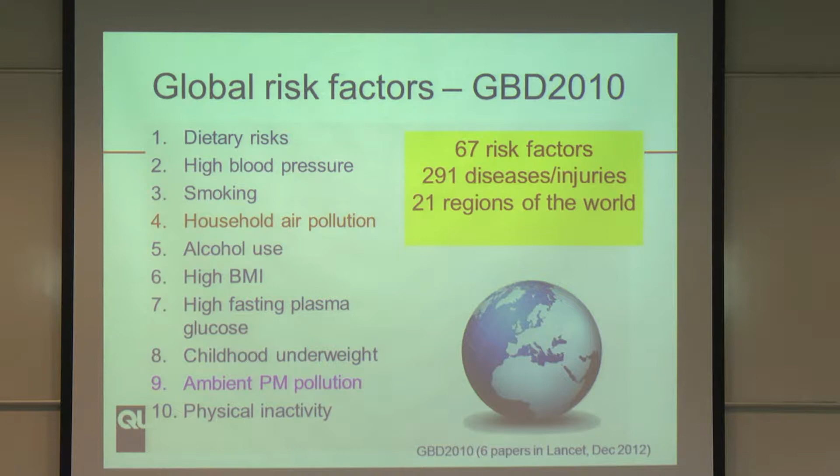Air quality and health, indoor air quality and health. I'll refer here, for those who attended my first talk, to this specific quantification or accounting for health effects. This was a major undertaking, Global Burden of Disease, published in Lancet, special issue of Lancet in 2012, which looked at 67 risk factors, 291 diseases in 21 regions of the world.

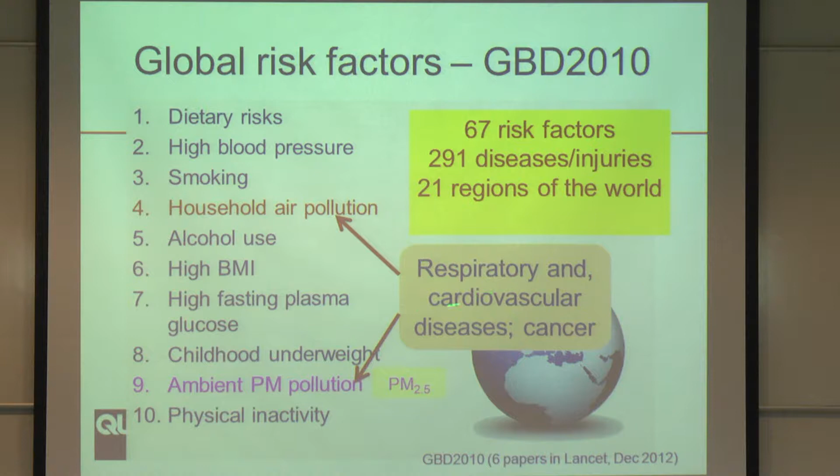And what came out of this is the list of the 10 most important risk factors. Looking through this list, you'll see this is quite interesting. Some of these are clearly related to lifestyle, to habits, and so on. But on this list of the 10 most important, you'll find these 2: household air pollution and ambient particulate matter pollution. Both of these have in common that they affect respiratory and cardiovascular health diseases and cancer.

And when talking about PM, particulate matter pollution, we are talking specifically about PM 2.5. It was quantified in terms of PM 2.5. For those who may not be familiar with this terminology, it is the mass concentration of particle matter with aerodynamic diameter smaller than 2.5 micrometers. So globally, I think it is quite interesting that out of these many risks, the 2 aspects of air pollution came up this strong and this important.

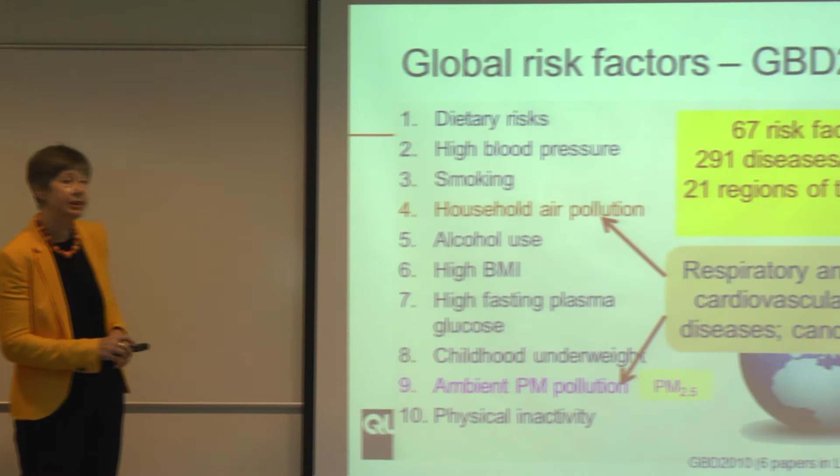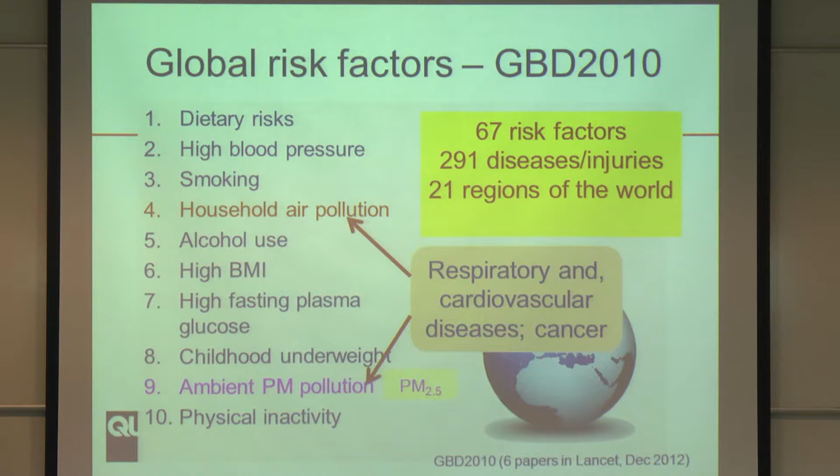We could talk more about this, but what I'd like to now point out is that from the website of GBD, you can find an El Dorado of all kinds of information, and you could look specifically at different regions of the world and specific countries as well. By the way, there's an update of this going on, and the first paper of the new update has already been published by Lancet, and within the next few months there will be a new version of this.

What I'd like to point out is, when zooming now on this part of the world, at your country, what are the risk factors here? You see similarity with the previous list, but also differences. One main difference is that while ambient particulate matter is still among the top 10 and actually went up higher, what disappeared from this list is household air pollution.

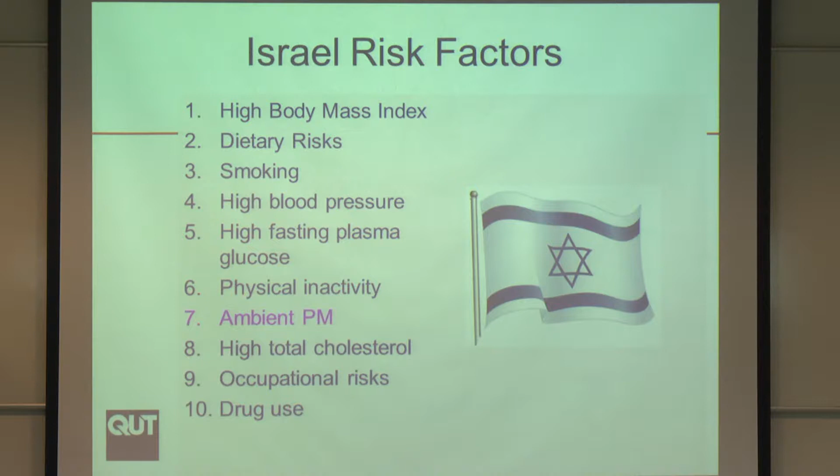Why? Because household air pollution really relates to environments where biomass burning takes place. We are talking open fire burning, this kind of environment, which is significant in developing countries. So the fact that it doesn't feature here on the list of the 10 means that in Israel this aspect is not that significant. Therefore, when talking about indoor aerosols, indoor air, I will not be talking about household air pollution in this sense, but I'll be talking about other indoor sources.

So this is ambient particulate matter. Ambient means outdoor. How are this kind of estimates done? There are many, many steps to this, and one significant step is to link concentrations with exposures.

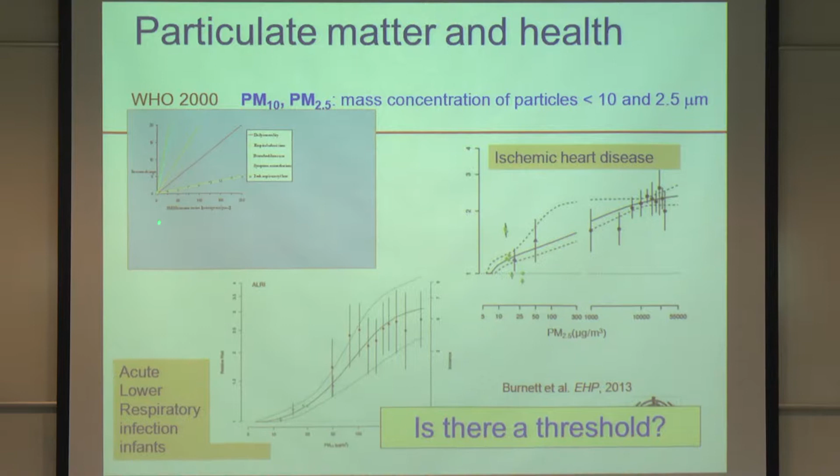In the older edition of the WHO guidelines, this was how it was linked through this linear relationship. This is PM10 concentration, particulate matter smaller than 10 micrometers, and various health effects: mortality, hospital admission, and so on. The important factor is that all these relationships are linear, finishing here at 200 micrograms per cubic meter because that's where the data were, and they were all extrapolated to these low values because then these values were not available.

Since then, many studies have been done. Here you can see there are relationships for two specific health impacts: acute lower respiratory infection of infants and ischemic heart disease. What you can see is that these relationships are not really linear across the whole range. If you look at just this particular range covered here, they are linear, but at higher concentration they level off, and they have different shapes at the very low concentrations.

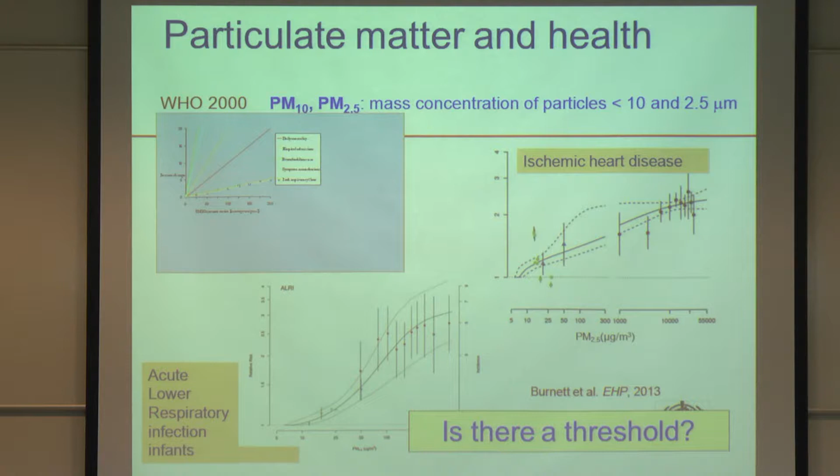But now we actually have data from very low concentrations, basically showing that there are no thresholds, which means that studies conducted at whatever low concentration still found health effects. So this is what we know, and this knowledge is progressing fast. There are more studies, and there are still things we would like to know better, but this is very well known.

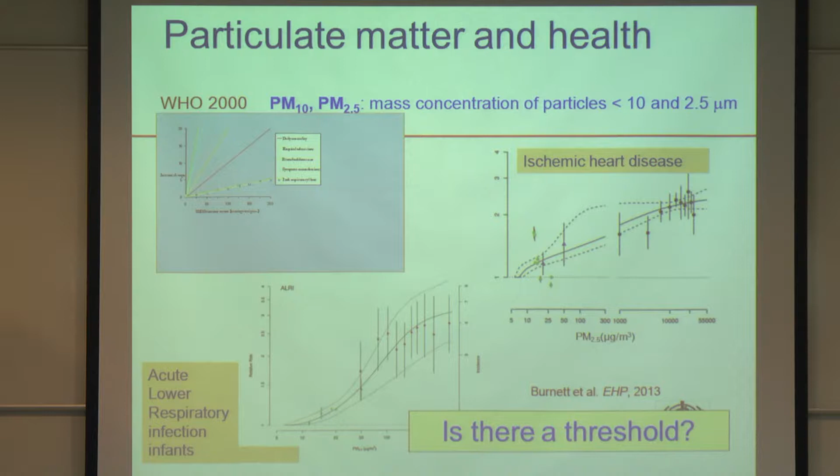One important aspect to remember is this is based on ambient air, not indoor air. So what we're saying is there's been large databases available on outdoor particles or pollutants. This data was used for prospective and retrospective epidemiological studies, and these studies show a very clear link between outdoor air pollution and health. However, we spend the majority of our time indoors—90%, if not more. So how is it that outdoor air has such an important and strong impact?

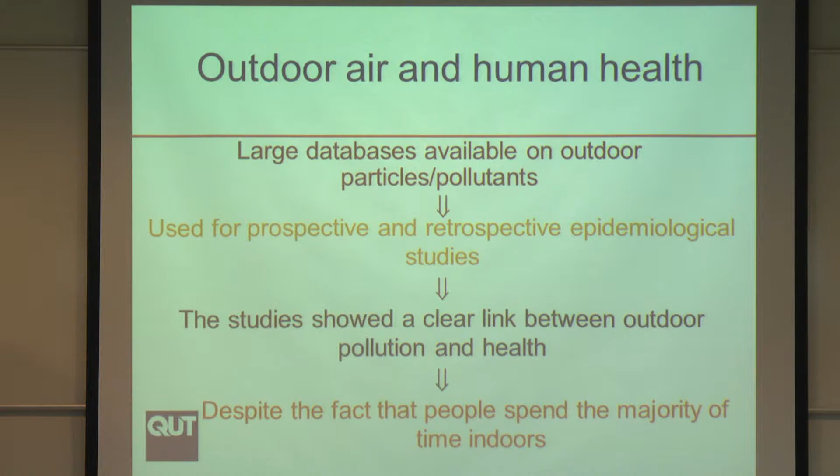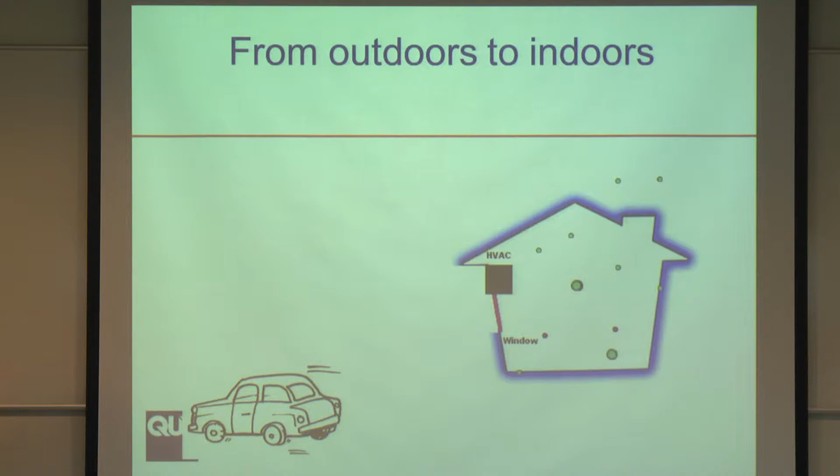Well, if we look at this little demonstration, we've got the house, and we've got this example of outdoor air pollution. The pollutants get from outdoor air to indoors, where they undergo all kinds of transformations. It all depends on many parameters: air exchange rate, penetration rate, filter efficiency, whether the building has mechanical ventilation, and in relation to particles, deposition rate on surfaces, plus other processes like particle coagulation and reactions. At the end, we've got different characteristics of the indoor aerosol, but nevertheless it is the aerosol coming inside.

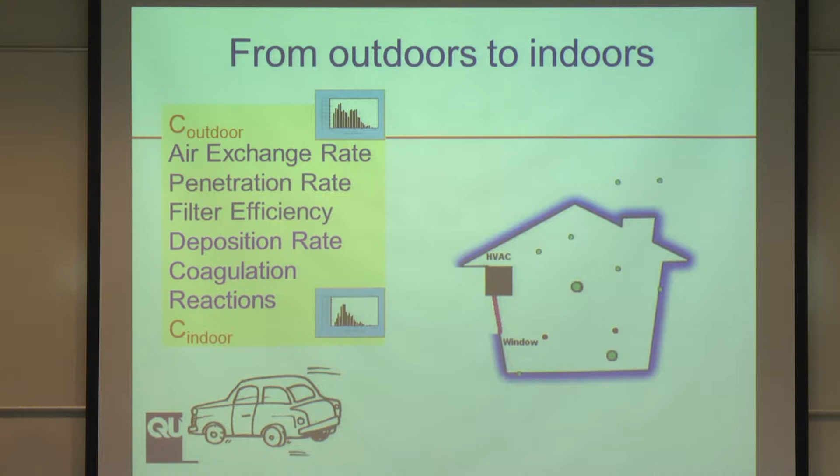How much of this aerosol is coming inside? One way to quantify this is by indoor-to-outdoor ratios. A simple concept: we measure indoor concentration, outdoor concentration, and calculate the ratio. So if we focus on naturally ventilated buildings and houses in the absence of indoor sources, we're just interested in that outdoor-indoor relationship. The general shape of the relationship is this.

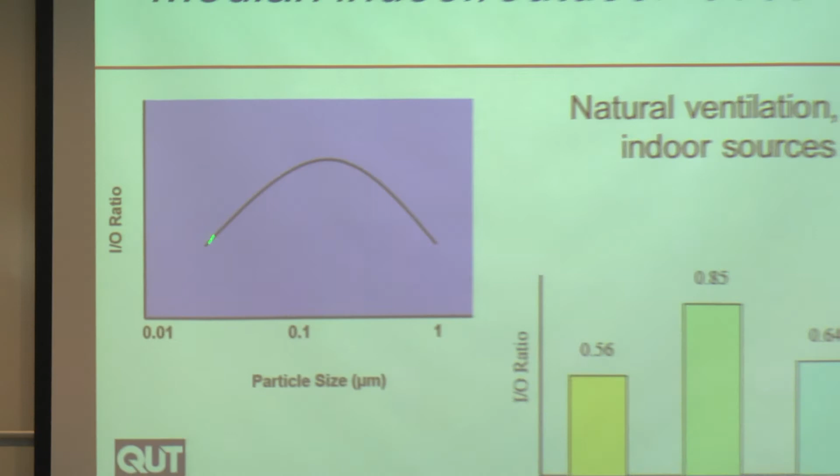With particle size on a logarithmic scale, the ratio has this shape, and we can explain this well. For smaller particles, the concentration indoors and the ratio are smaller—there's a very efficient removal mechanism by diffusional processes. On the other hand, for larger particles, over 1 micrometer or larger, there are other processes like impaction and interception. So there's the least of the forces acting in this middle range.

If you look at these values from literature reviews, you can see that for particle number concentration—the smaller particles—the ratio is about 0.56, 0.85, 0.64. Another way of thinking of this: 85% of PM2.5 from outside is inside. That's a very simple concept, but it shows how much of this is inside, and these are real studies. This explains how important outdoor air is.

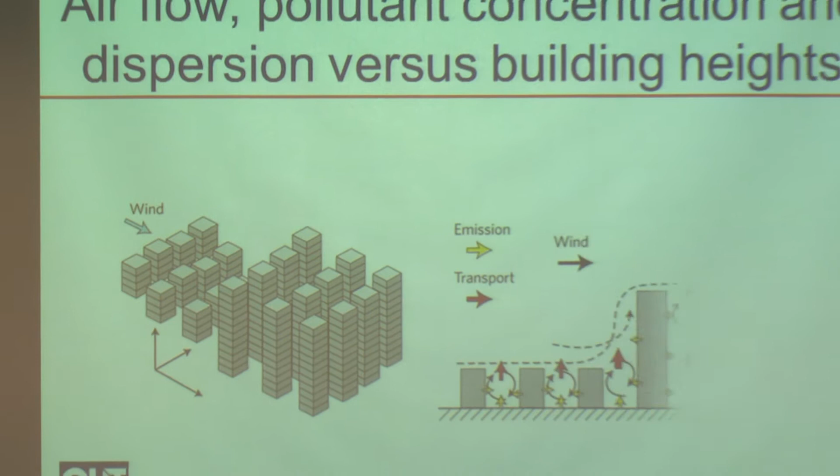This knowledge is emerging. I found an interesting paper published on this kind of environment, about high-rise buildings and how winds from a certain direction create eddies around the buildings. So if we want to calculate indoor-to-outdoor ratio for a building, which outdoor measurements do we take—measurements here, measurements there, and so on? So even this aspect of indoor-to-outdoor ratio has its complexities.

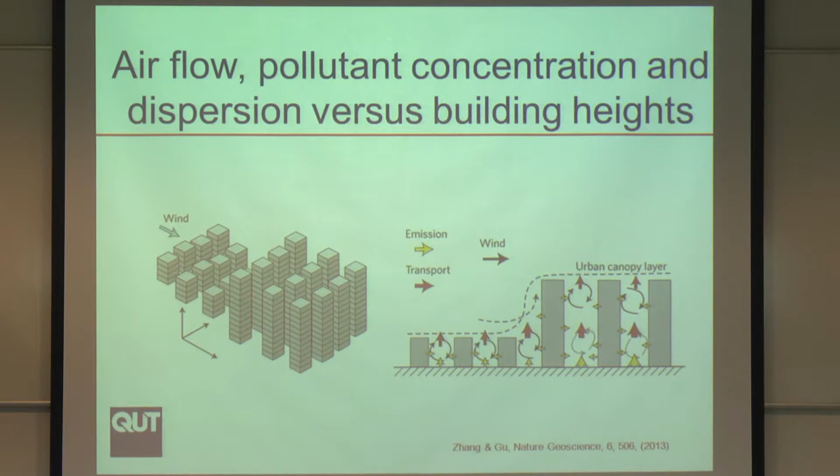But as I said, we are certainly developing good knowledge about these things. So this is the impact of outdoor on indoor. Now, do indoor pollution sources matter? You could say, well, if outdoor has such a pronounced impact, maybe they don't matter at all.

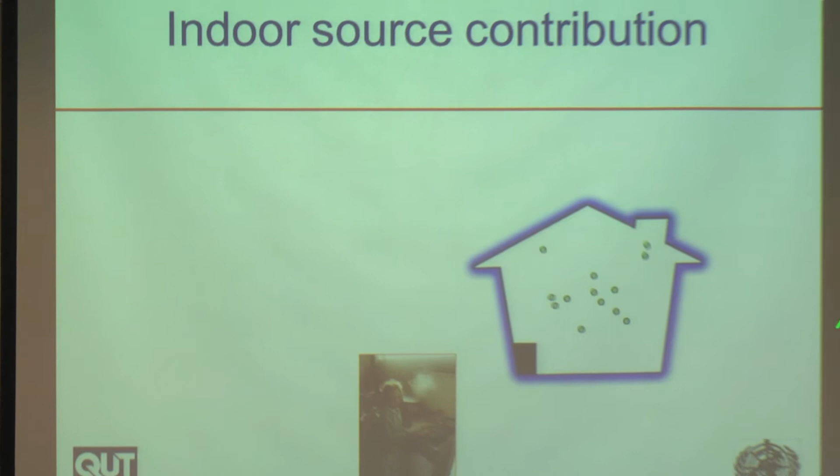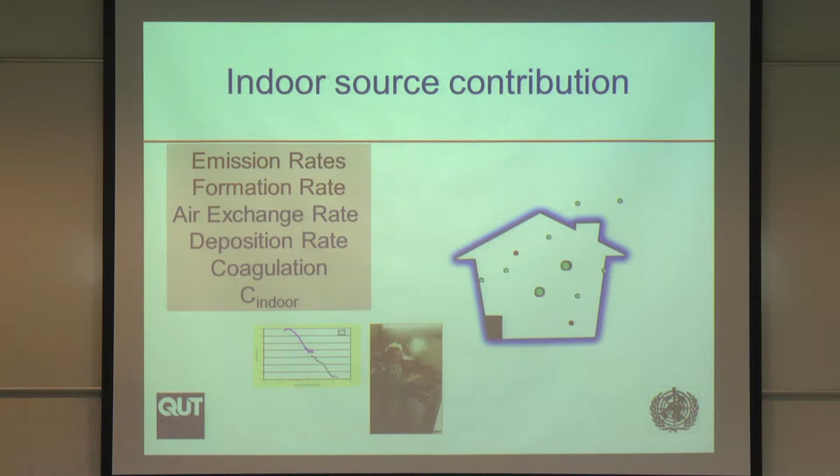Again, a graphical representation of what happens inside: pollutants emitted from a source, be it a stove or whatever, undergo all kinds of processes, and here we are looking at different aspects. We are looking at emission rates of these indoor sources or formation rates of particles, for example, again, air exchange rate, removal, deposition rate, coagulation, and so on. So it's a whole complexity of the dynamics taking place inside.

There was an interesting assessment conducted under this EU project, indoor air contaminants and contribution of indoor sources in Europe. This is a table, and I'm showing just for the time being a part of this table. So we are looking specifically at PM2.5. Now this is the long-term WHO indoor air quality guideline value.

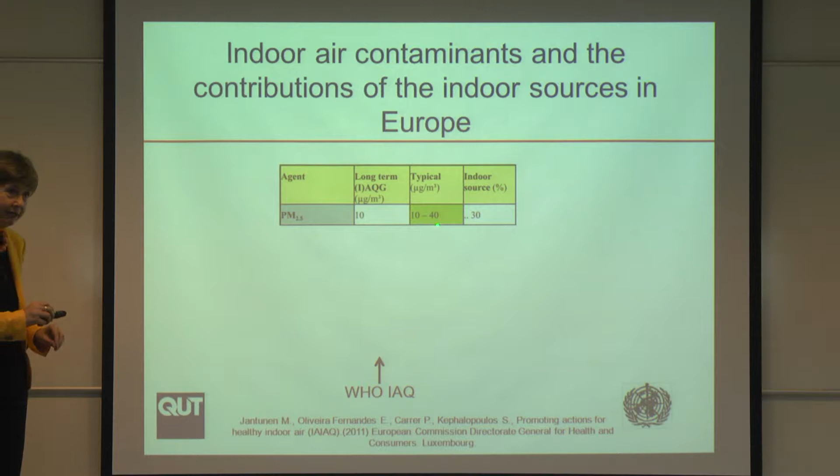Now, if the concentrations are typical, meaning 10 to 40 micrograms per cubic meter, then the indoor source has about 30% of contribution, and the outdoor source has about 70% of contribution. So for typical concentrations, it's the outdoor source which is the most important. But if we look at the high end of concentration, like 100, 300, then 90% of contribution comes from the indoor sources. So indoor sources are important.

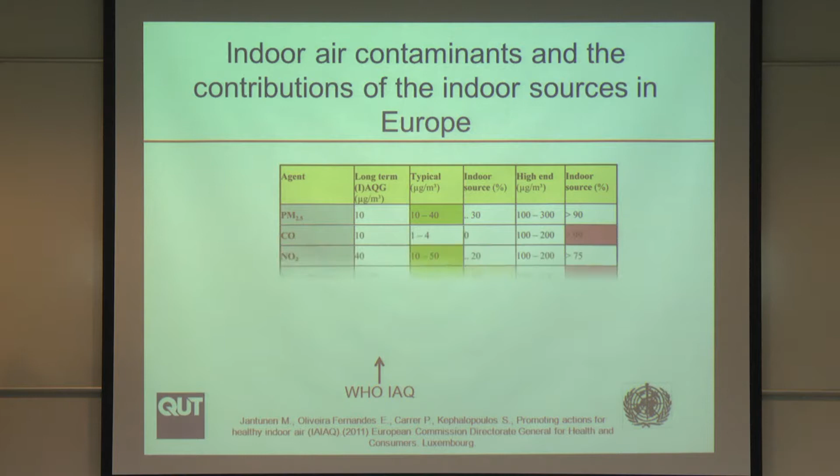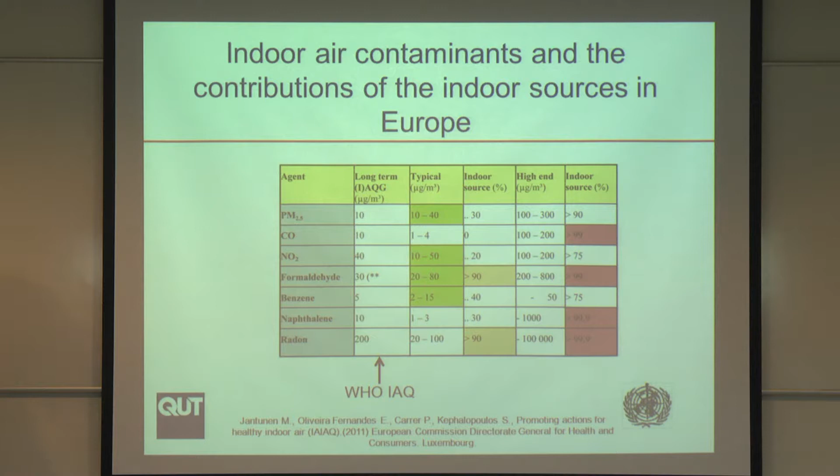Now I'm not going to talk about the rest of this table. The same considerations were done for other pollutants which are covered by the WHO indoor air quality guidelines. So using this information, there was an assessment conducted to look at DALY, which is disability adjusted life years, meaning life years lost to death, and years lived with disability if a person acquires a disease.

We have here all the different European countries, and we've got the blue and red. Red is contribution from indoor sources to this DALY, and blue from outdoor sources. So on this you can see that both indoor and outdoor have contribution to this global burden of disease quantified as DALY.

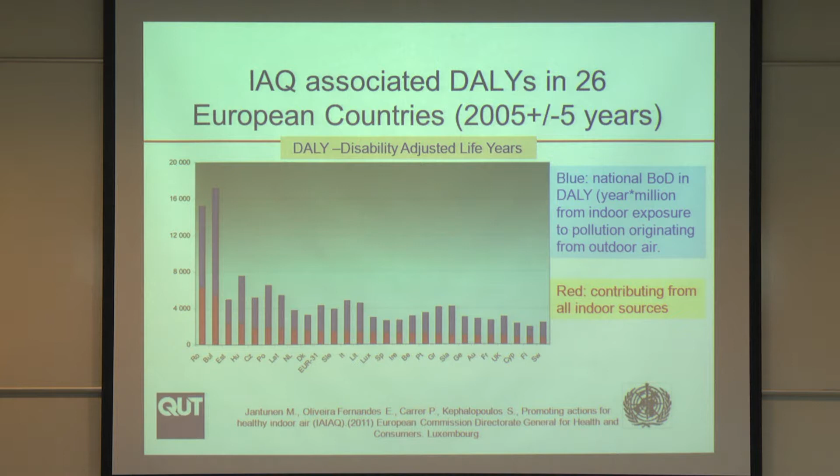You can now ask, okay, which of the sources, which of the exposures are important? And there are two ways of looking at this. In this case, from the same report, it is key exposure agents, and there are these different agents, and you can see that the biggest chunk of this pie is combustion particles, which is outside.

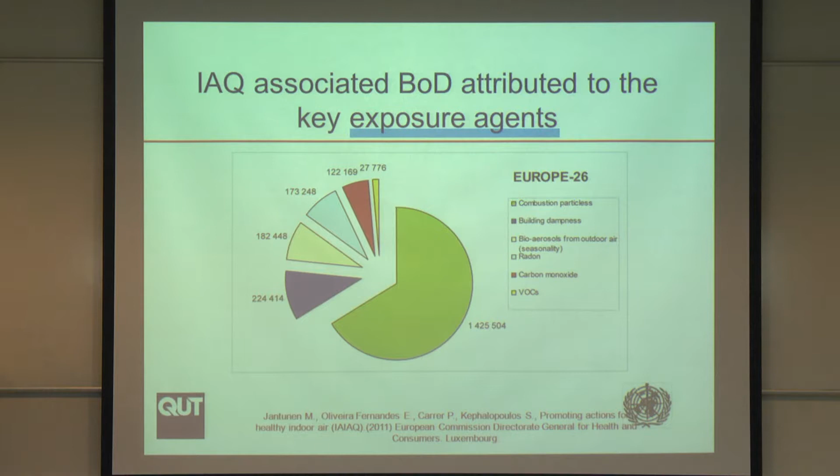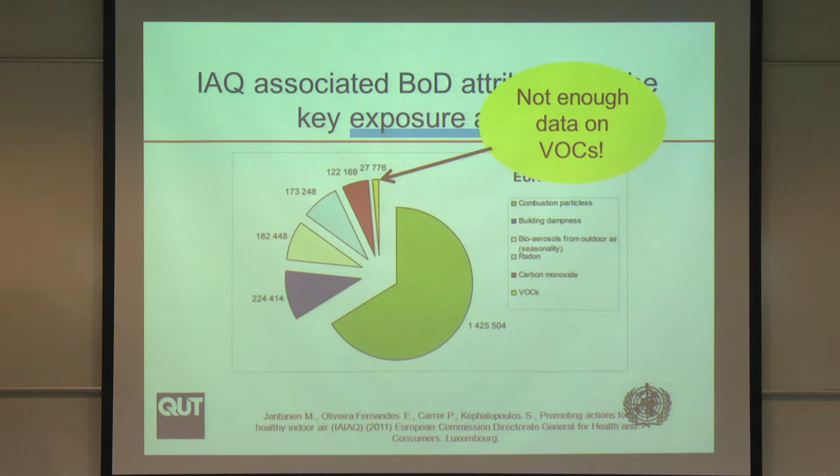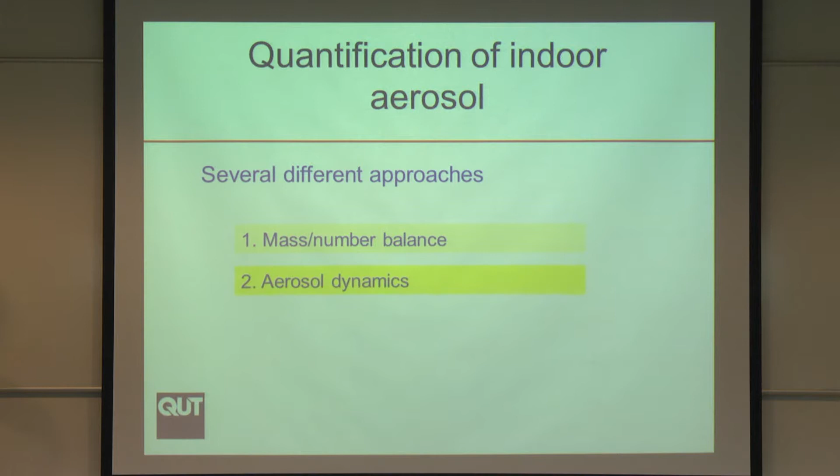Now this is supposed to be changing the angle of discussion, so we look at something very different now. Quantification of indoor aerosol. There are many different ways of doing this. Say, taking the so-called mass or number balance equation, looking at aerosol dynamics, or a combination of different models, including CFD modeling. I will not be talking about quantification as such, but I will qualitatively talk about quantification. Otherwise, we'll have to be here until tomorrow.

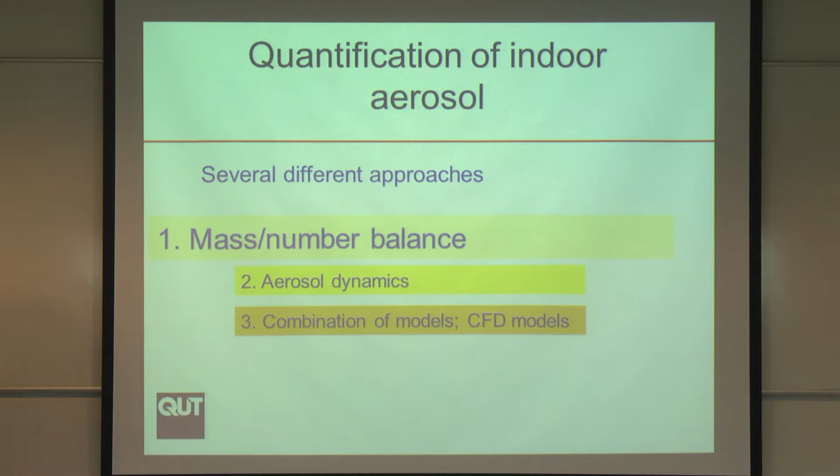Just for a moment, we'll focus on this mass balance equation, because it is in a way the simplest concept, but it brings up some issues. It's a long equation, but it's quite straightforward. So we've got the indoor concentration, outdoor concentration, penetration factor, air exchange rate, deposition, flux from indoor sources, emissions, volume of the interior.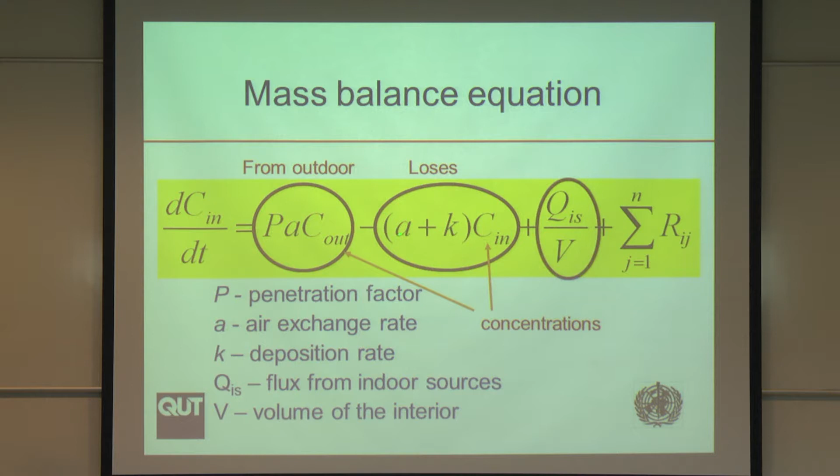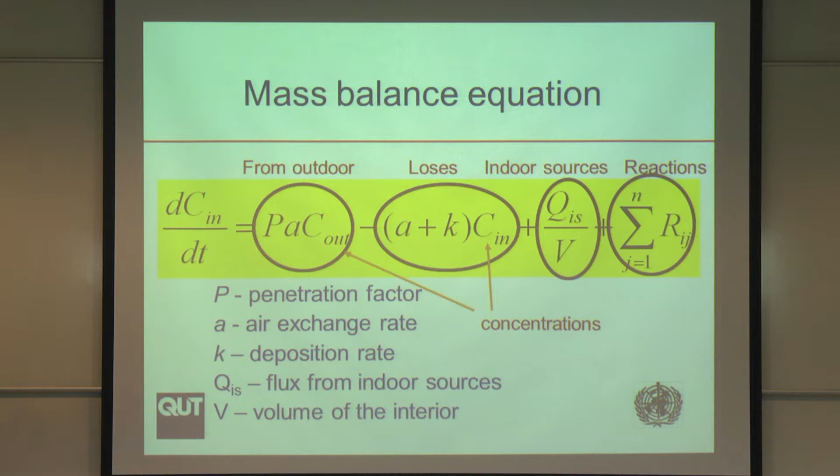So basically, we have several different terms. This is coming from outdoor. These are the losses as a result of air exchange rate and deposition. This is contribution from indoor sources. These are reactions. Simple concept. One could say, all right, provided that we have all these parameters, we can just quantify everything in any environment. Well, is it always really very useful?

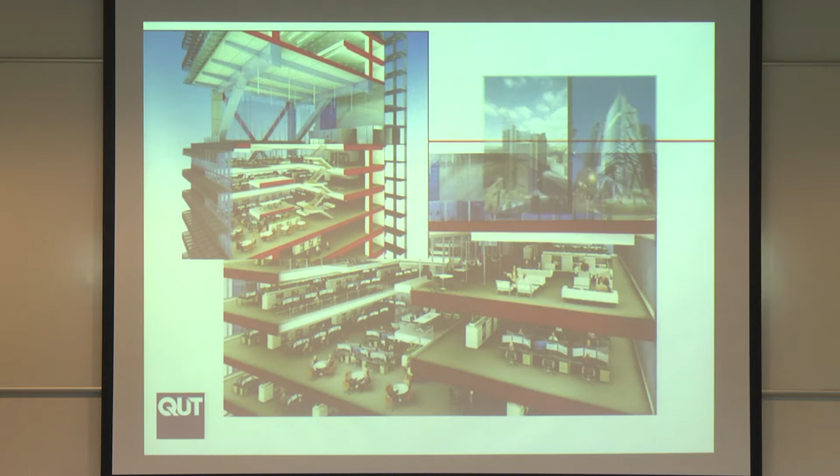Let's look at this building here, which is how it looks. It's a particular building in Sydney, quite a futuristic view. But if we were to calculate the mass balance equation for this building, you can imagine how many different zones and places there would be. So where would you put your monitor? Which exchange rate in which place? So basically applying the concept of the mass balance equation to this building is not very practical.

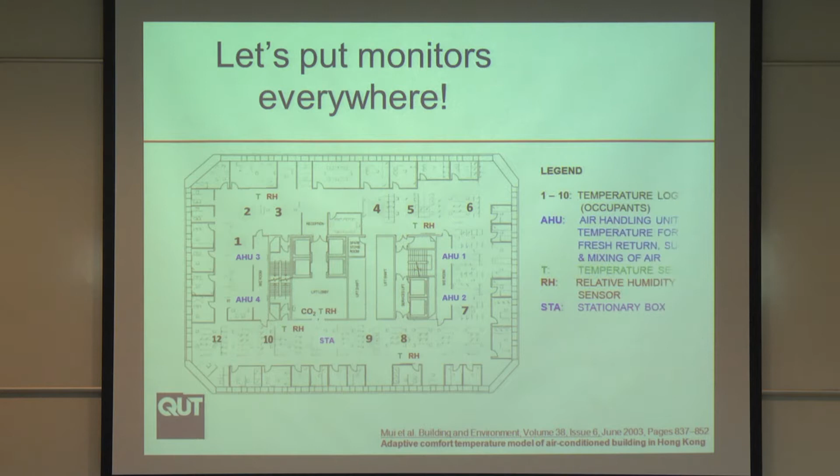All right then, let's put monitors everywhere. Let's monitor all these parameters. This is one example of one of the early studies on this, and you can see lots of places where this office environment monitoring was taking place. Lots of different parameters, but really air quality parameters and specifically particles are very rarely monitored.

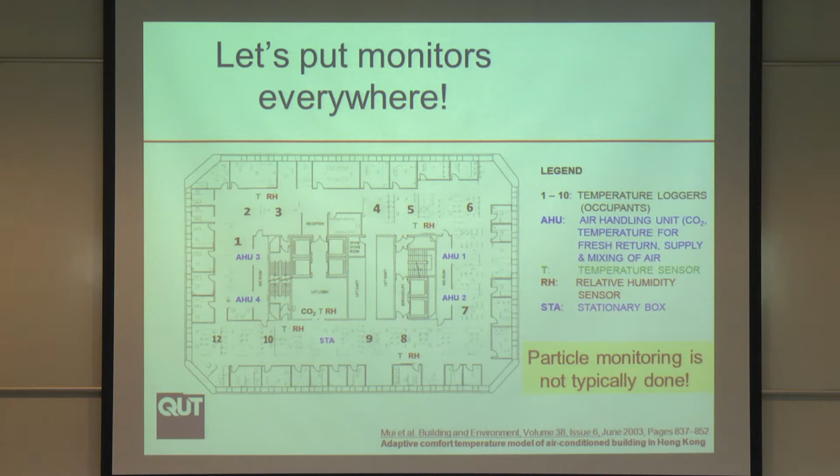But still, this is the future. This is coming, and in no time at all, we will be surrounded by all kinds of monitors, whether we like it or not. For example, having cameras all around us may not present the pictures we would like to.

Now, we can then move from that simple mass balance equation to aerosol dynamics, and here it's just a qualitative way of presenting aerosol dynamics. We've got particle coagulation, we've got particle evaporation and condensation, we've got particle deposition on vertical surfaces or on horizontal surfaces. Different processes contribute to this. And that last one here is what? Transport, all things which take place during transport.

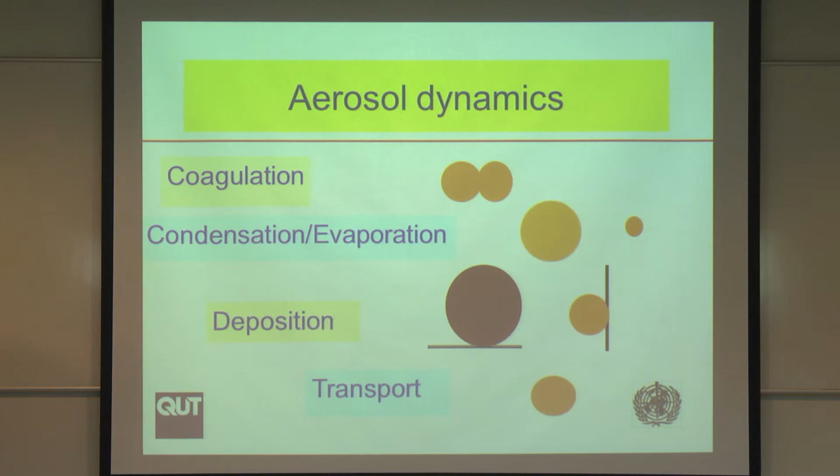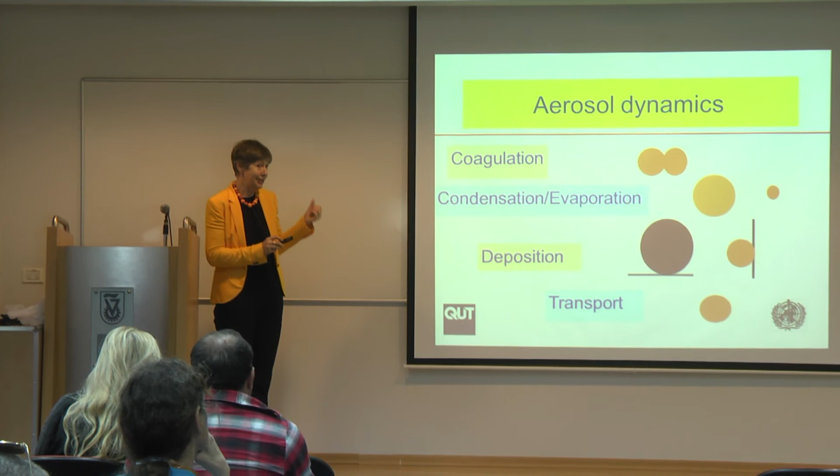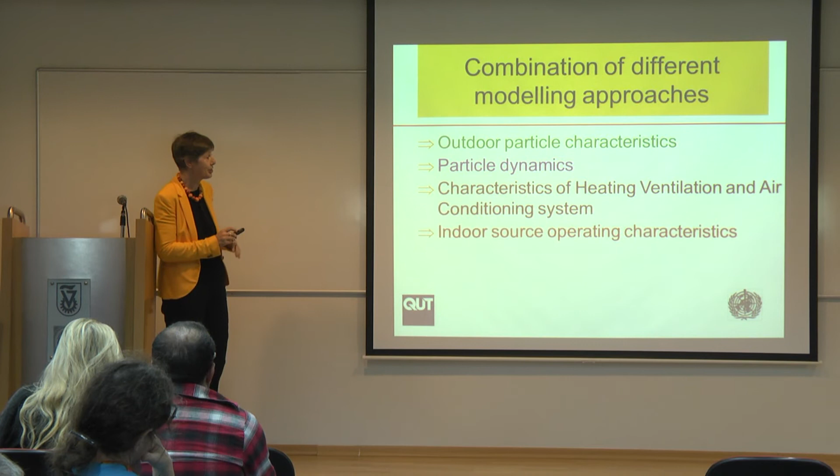There are equations, there are textbooks going back many decades, so we can calculate this reasonably easily if we have all the right parameters. So as I said, I'm not going to discuss the individual equations. But the third aspect of that quantification, which I mentioned, are models. And there's a plethora of different types of models for calculating anything we want, we dream about, and in any way we want to do this. So it's a list of several models. So it's just another area expanding of the models.

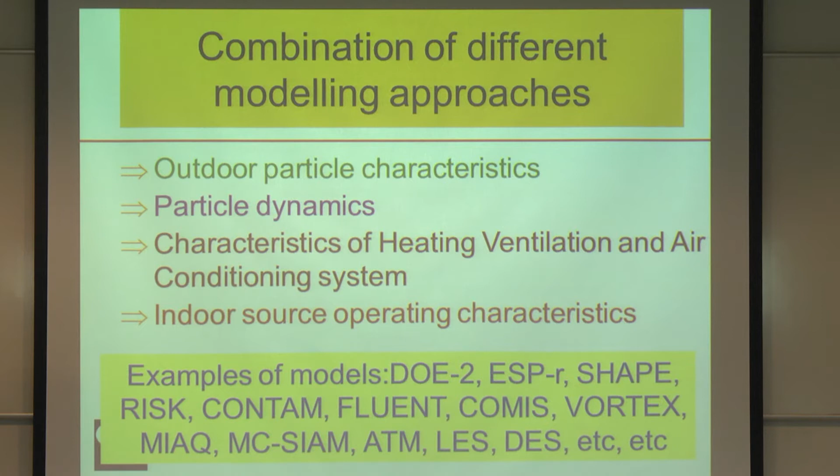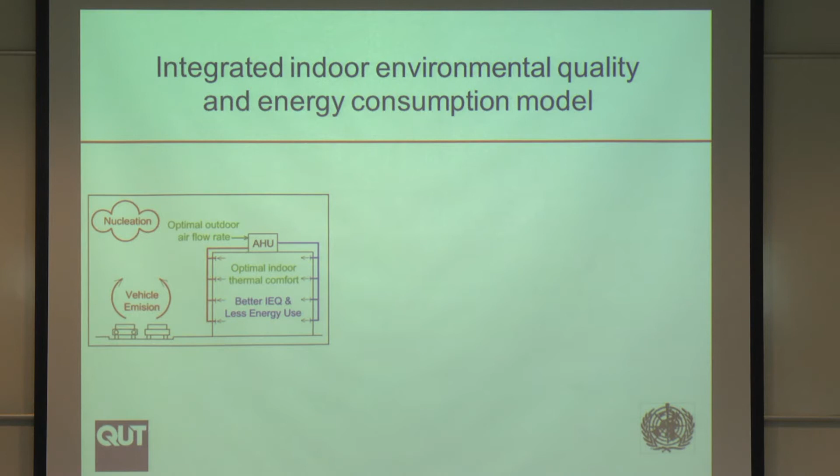One interesting aspect of this modeling is presented here. More and more the models of air quality are linked with energy and energy conservation, or the other way around. The big focus is on energy, and occasionally there's looking also at what's the situation with indoor air quality.

So if we try to optimize what's happening in the building, in relation to building activities, energy use, but also the outside sources, we can say, let's ventilate the building, let's get rid of anything generated inside. But then we are bringing all these nice things inside. So that's a bit of a problem. So there are these kinds of models. This is, again, one of my PhD students who came up with this model for optimization, and here is the optimization of energy and air quality.

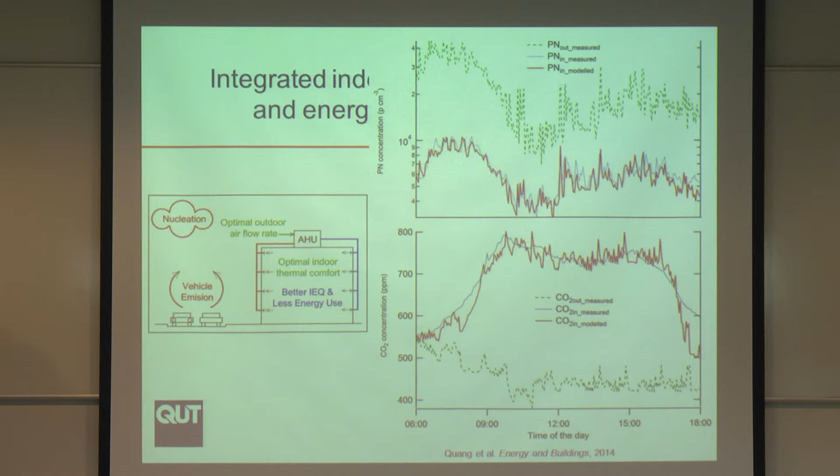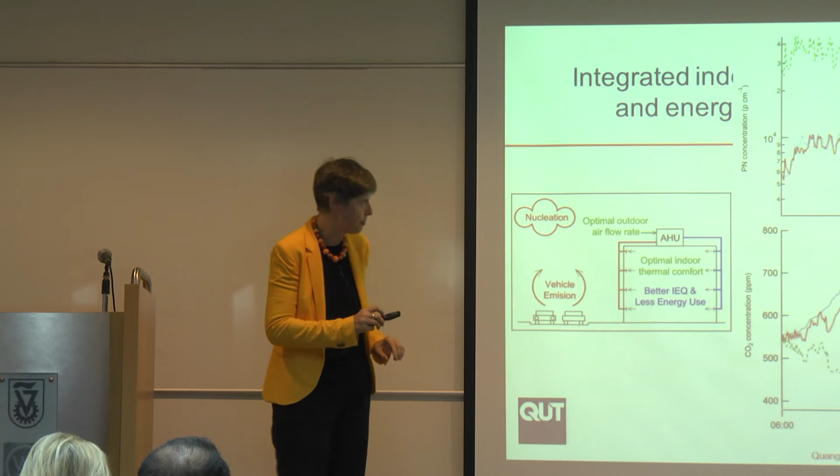So he looked at, in this case, particle number concentration, indoor, outdoor, measured versus what the model predicts, and then CO2 and so on. So this is that energy air quality, but as I said, it is the energy which is driving this kind of thing, driving to the point that this went outside the research domain to public life. If you see a cover of a magazine like Time talking about the smart home, then you see that it's not just research. But what does it mean, a smart home?

It means energy efficient, it means self-sustained, in particular making our life easy and enjoyable so we don't have to do anything, and this way less exercise, so I'm not sure whether this is so good. But smart home now is not really understood as a home which caters for good air quality. So it's another bit of an issue, but as I said, there are now attempts, and we can now link this to energy and air quality.

So this is this modeling approach, and one other aspect of the modeling, just to show how it works, CFD model, computational fluid dynamic modeling. We can probably recognize, David, this place, yes, my office. And there were very keen students to calculate, if a printer was placed in different locations, what it would do. We can generate lots and lots of very nice images like this. It is very demanding because you need to have all the parameters for this, and then you change slightly something and the pictures change. So you can generate another 100 pictures. So that's very nice.

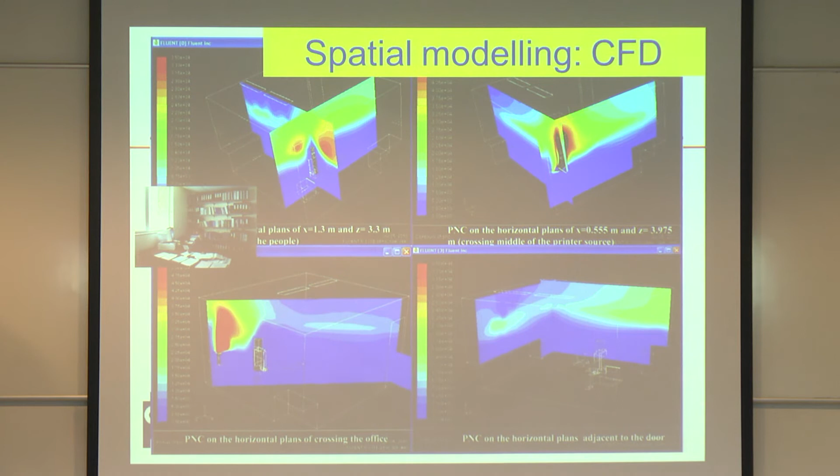But the summary of what I've said so far about this quantification is that if we put our tools together, we can basically account for every particle of the interior of choice through whichever of this modeling, measurement, and so on. But interior of choice. So it's not something that we'll develop for this building and then we can use for the building next door, because next door is different and it will require a lot of computational work.

So how does all this have practical applications to real environments? Relevance of various processes, so many parameters needed, and the parameters can change rapidly. We'll open the window, the deposition here will change. The parameters are building specific. So all this science is there, but the applicability of this is a question mark. The title for my presentation came from this, the relevance of various processes.

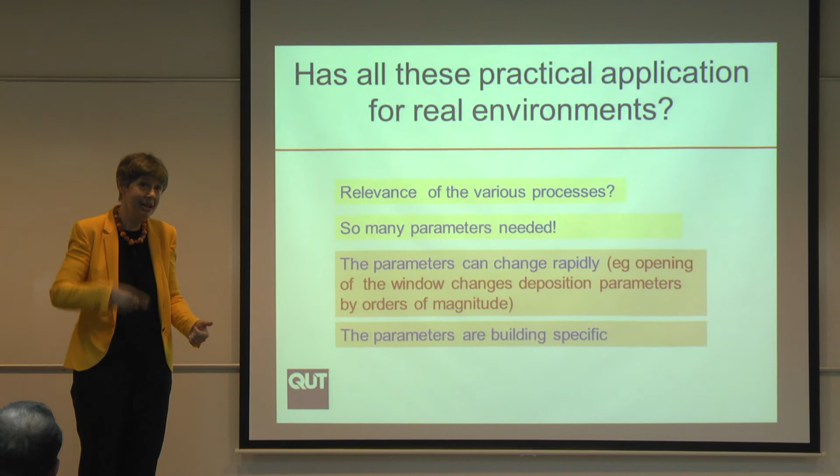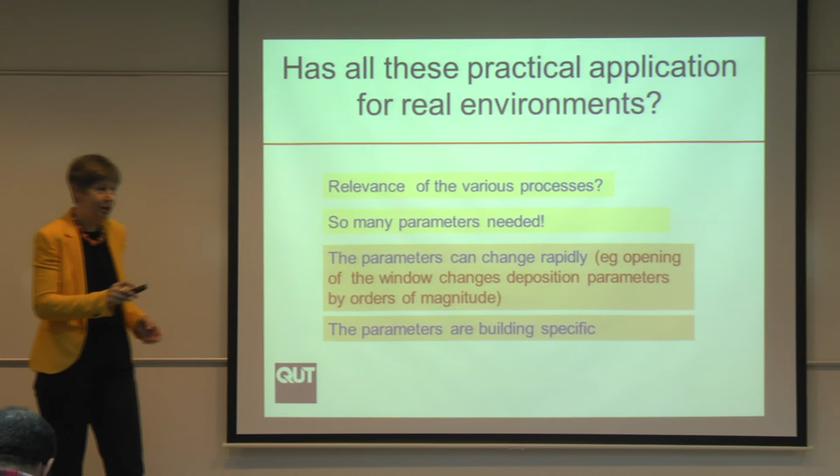In, for example, this room, is coagulation important? No, it's not important because concentrations are very low here. Air exchange rate takes care of this. But many people modeling this will put all the processes into a very big model, calculate this, something will come out. There was a very heated discussion among a group of us during a conference a year and a half ago about what's important, and now a group of us is writing a review paper on this. That's the reason for the topic.

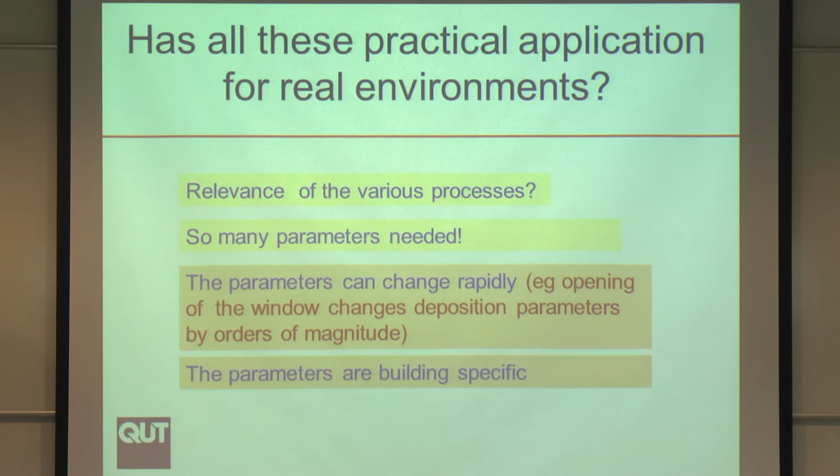So there is a really huge gap between what we can do using aerosol science and predictive modeling and what is done in practice. Who is to close this gap? Scientists or the practitioners? This is another issue. So now I move to the areas where science is still developing.

I've already mentioned during my first presentation, when talking about all these different environments, I keep clicking the wrong button here, all these different environments where all the different things are happening, there are 2 or 3 important things which are characteristic to all of them. Transient nature of the indoor source operation, role of the background, and secondary aerosol formation.

But with this little background, I'd like now to focus on SOA. When you look at this picture, it doesn't sound like SOA whatsoever. It's just an issue of particles in an office. It's an office here, and the question was, is the ventilation filtration system of the building efficient to take care of pollution from a busy road, a freeway, which is next to the building? Well, the government wanted to know this. We work with them closely, so I said, let's do it. Nothing interesting would come up whatsoever, but collaboration with them.

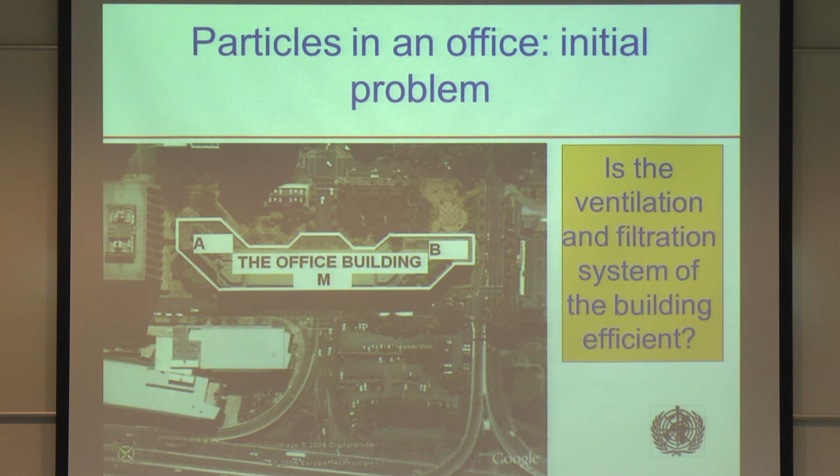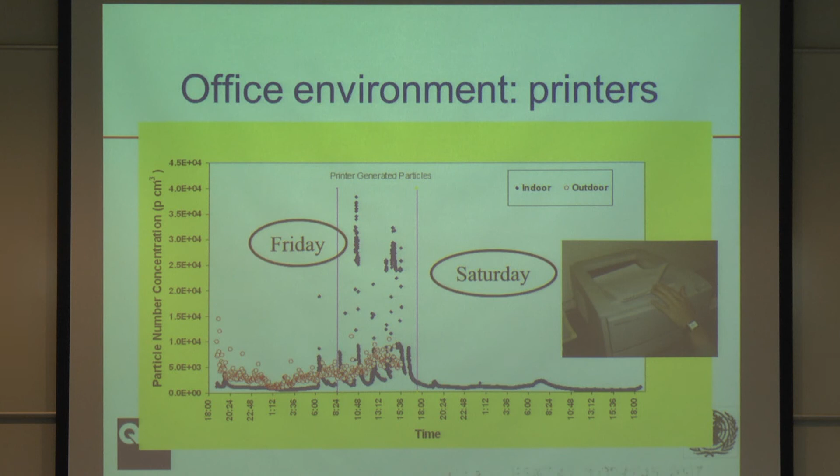Now, as we started doing this, this came out and started putting our hypothesis and all of what we were doing under a question mark. This is, again, time series, particle number concentration. This is indoor and outdoor. If we look at the outdoor, this red, it's changing. Of course, there are vehicles outside, it's changing. But what's happening indoors is behaving as what I said just a moment ago. It is these big peaks.

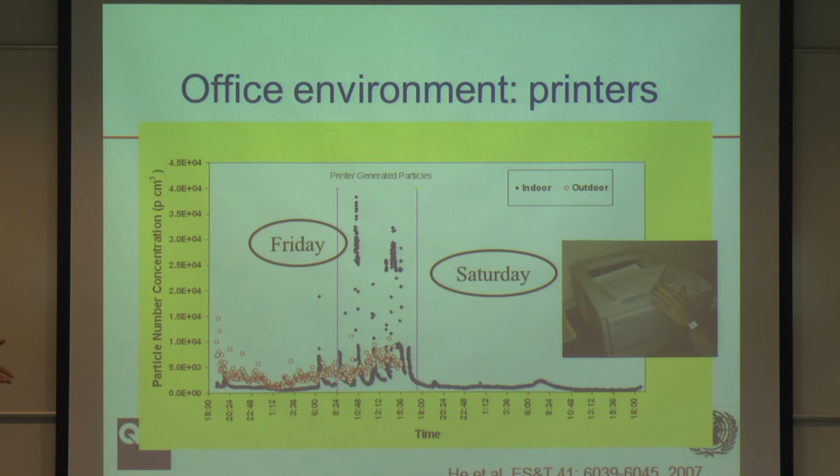It's an office environment, completely mechanically ventilated, strict regulations in Australia. Nobody would dream of smoking a cigarette anywhere inside. So where is this coming from? We searched through the whole building for a source, and no source was identified. Eventually,